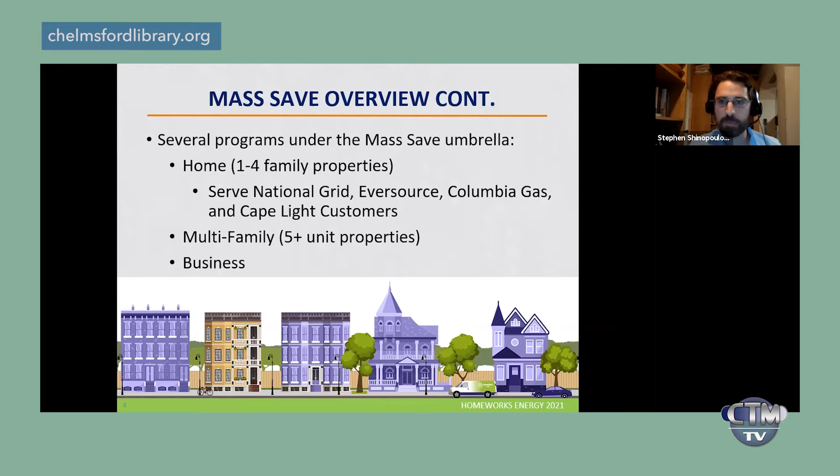Okay, so getting into the specifics of the home energy assessment, we offer, of course, traditional in-person home energy assessments, and then kind of as a response to everything that happened in 2020 and just being conscientious of the situation, the program did roll out virtual home energy assessments. So it allows the same access to the program just via taking pictures and a phone call or video chat.

And if some further projects are something that you might be interested in, we still do an in-person walkthrough later to make sure that we're ensuring the quality and the scope of any work. So that's just with in mind of reducing time in the home and things like that.

So the first step of a traditional home energy assessment is the health and safety check. And the first point of that is what we call the combustion safety test. So the combustion safety test tests the carbon monoxide, the efficiency, the airflow of your heating system. It also would look at things like your domestic hot water and potentially your gas stove if you cook with gas.

Next is a weatherization or insulation check throughout the home. So we're going to look throughout the home, basement, walls, and attic, assess the current insulation, any rebates you'd qualify for, and provide that information.

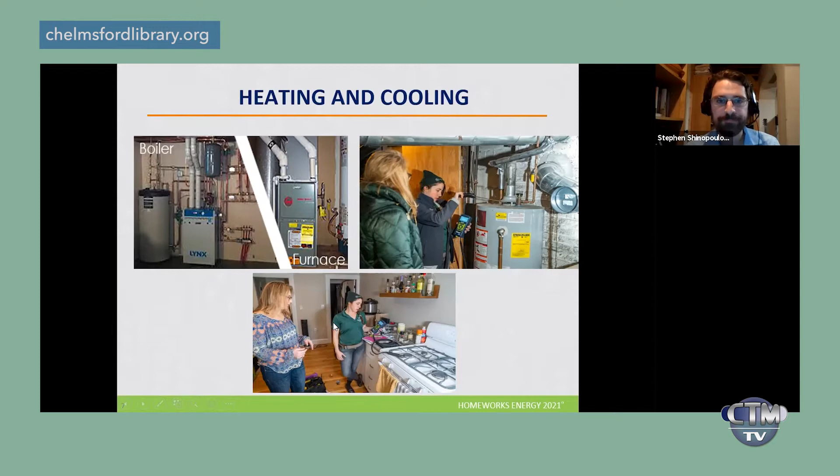There's a few reasons for that. Just to list them off, it's more cost effective. It's cheaper to produce, and it also has a higher R-value. So it's just quite literally more bang for your buck. It has some kind of secondary benefits, like it's treated to be fire resistant. And that same treatment also is something that bugs tend to not enjoy. So it kind of acts as a bug repellent as well. So it has a few kind of secondary benefits to just the insulation aspect.

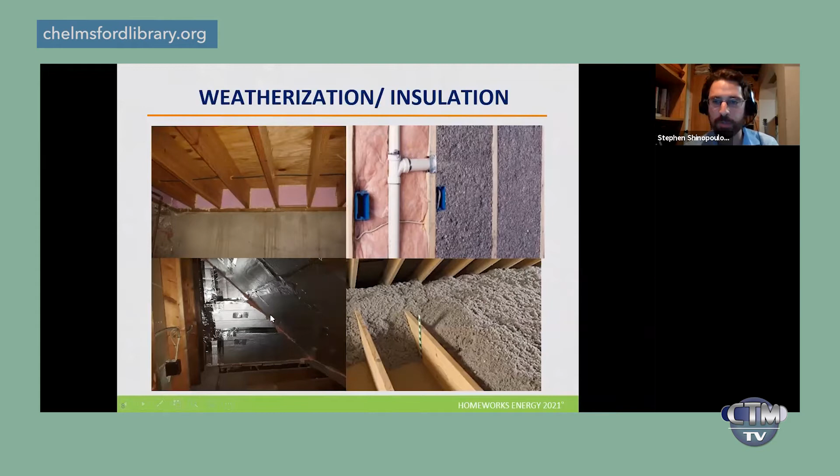And we'll use this for certain applications like vertical surfaces that something like fiberglass or cellulose just aren't a practical fit for. So in certain applications, we'll use this foam board as well. And it's an excellent insulator.

And I do also like to make a side note when I get to this slide that you might be looking at this blanket of insulation and wondering, oh, I have storage in the attic or a pull down staircase or potentially an HVAC system. And that's one case where we do still use that fiberglass batting insulation. We call it damming, as in like you would dam off a river. And that fiberglass batting is what would seal off certain areas like your staircase, your HVAC, or your storage. So we're prepared to deal with attics on a case-by-case basis.

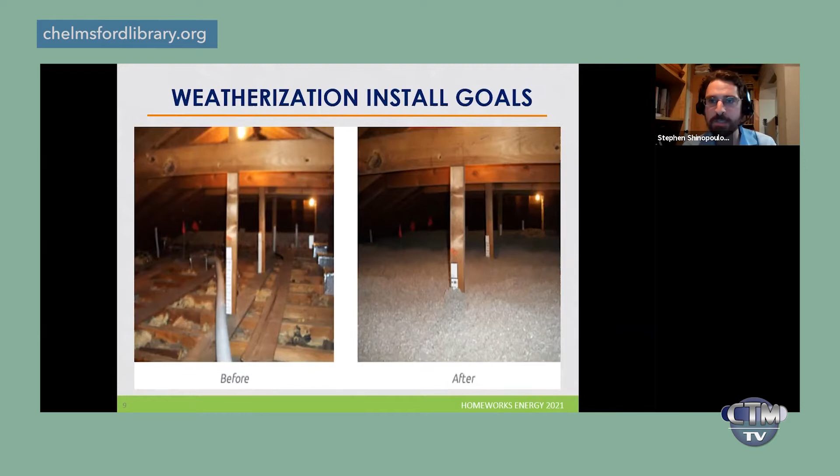And just to build off of that, the program is very aware that the attic is a very ideal area to weatherize your home. It's relatively simple, and it makes a big impact on the comfort and the savings in the home. And in turn, we make an emphasis to help homeowners with that because understandably, people have storage up there. They might not be able to deal with it themselves. So we can address that when it comes up.

We also do what we call an attic floor buildup, which is just a cool little tidbit I like to mention for folks who want storage in their attic and the maximum amount of insulation. We can actually build up the joists to accommodate both of those. So just a couple of pieces of info about working with attics.

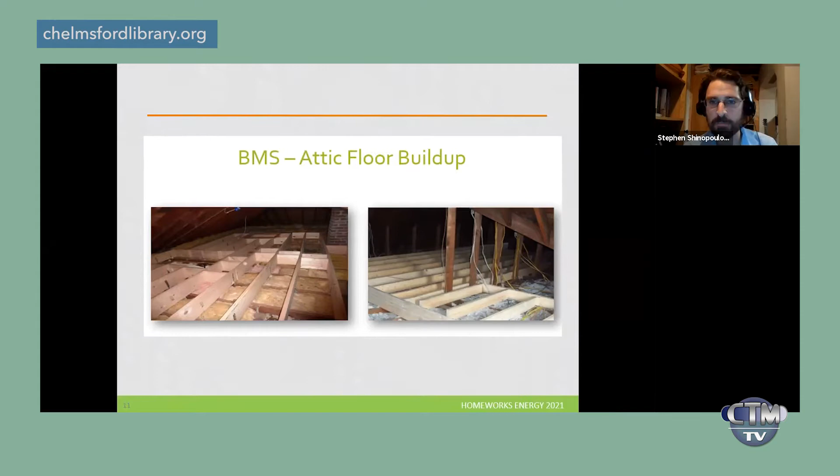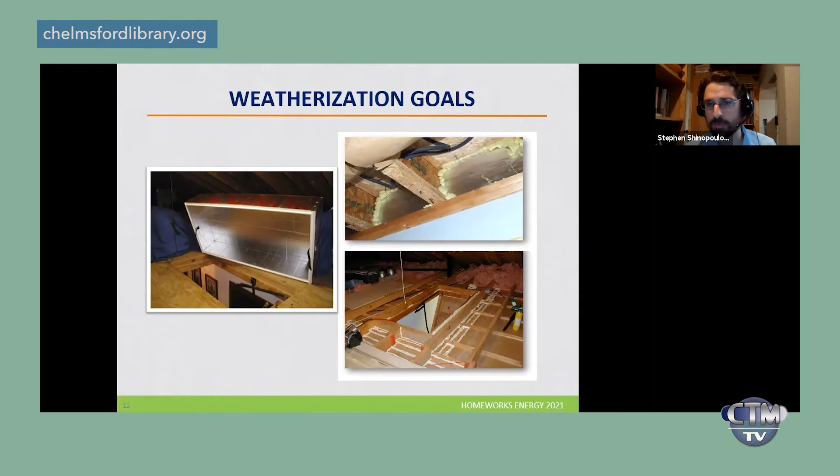And just one cool piece of the Mass Save program is that all of these air sealing measures, as they're deemed, are covered at 100% rebate. So all of this work can be done at absolutely no cost.

I do like to take a minute to address working in older homes because, of course, Massachusetts has a lot of beautiful historical homes. And it's something that we work with commonly. It just might be a little bit different on a case-by-case basis compared to some newer builds. Older homes didn't typically have as much insulation. The building code started to change in the 1980s to accommodate more wall insulation, more attic insulation. But there can often be a lot of opportunity to retrofit in these older homes. Part of the process that we work through is something we call pre-weatherization barriers.

And these are typical things you'd run into, like knob and tube wiring, which is the original form of electrical wiring that was used in homes, structural integrity of older walls, for instance, water damage, asbestos, just kind of the full assortment of projects you might have to work through in a home.

There is some opportunity for working with windows in the Mass Save program. There are not rebates for replacing windows. You can, however, finance moving from single to double pane windows. So that's another point I'm going to address in more detail in just a minute.

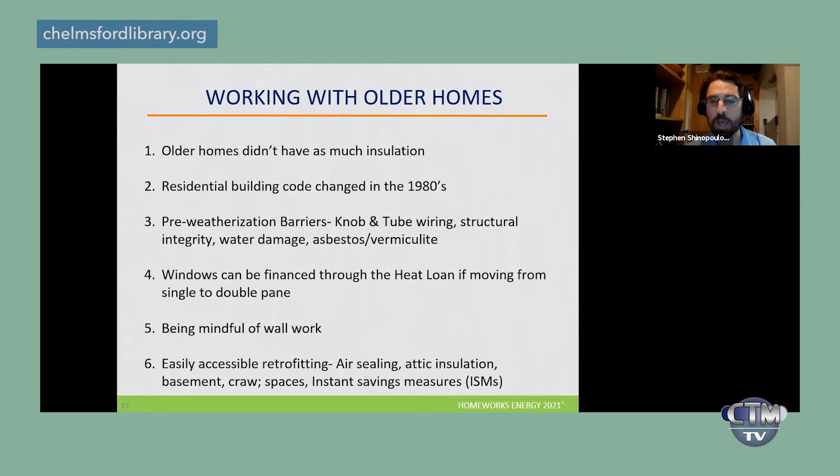Now, that being said, there are some very easily accessible retrofitting programs that even if for some reason you didn't want to insulate the walls, you can air seal the basement and the attic. Attic insulation is very easily accessible, and it's a relatively easy project. The same goes for the basement, insulating the perimeter of the basement, crawl spaces, and then instant savings measures, which are something that we give out at no cost during the assessments, and I'll be going through those item by item in just a second.

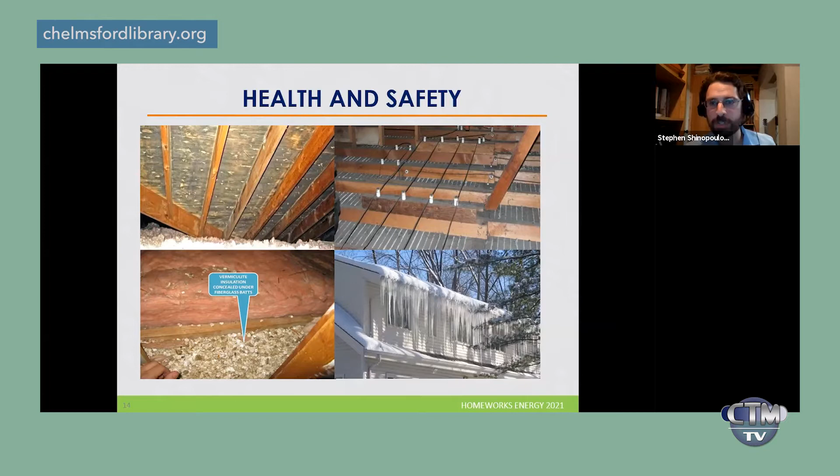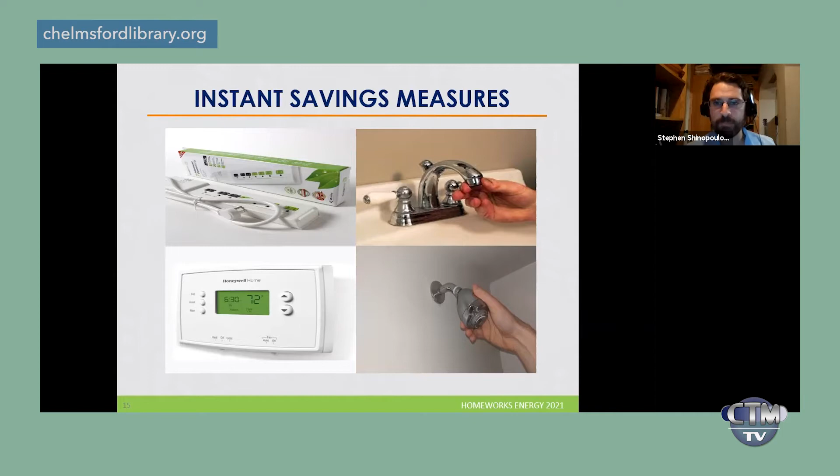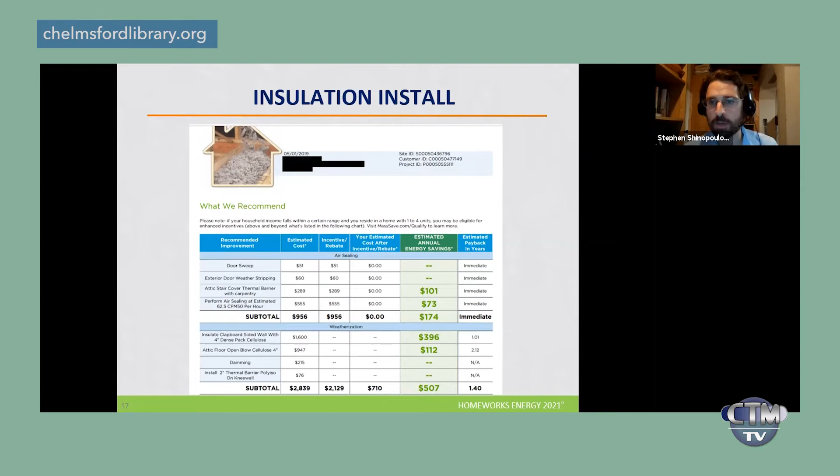Okay, and finally, essentially what I just went over, the home energy assessment report. We generate that with the homeowner and go over it, because every house is a case-by-case custom assessment, and we go over our findings each time with the homeowner.

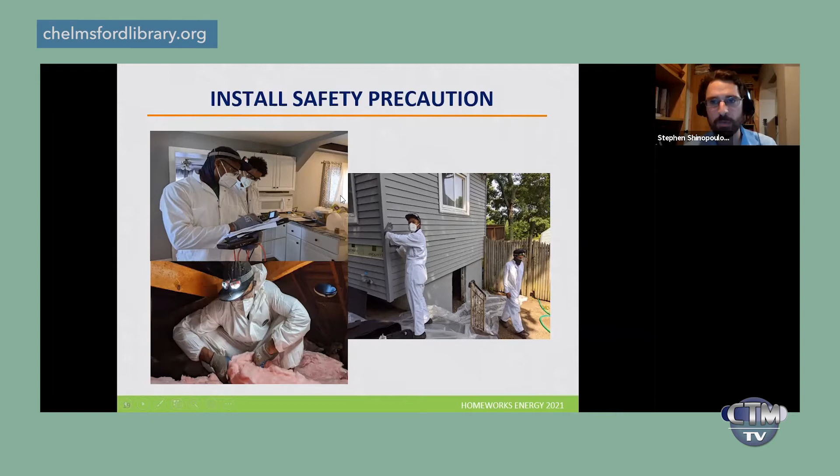Some notes about the current climate, 2020 and moving forward. The program did shut down temporarily in 2020 to make sure that the work was done safely and properly. We are very persistent and adamant about following these safety procedures. Our crews wear full Tyvek suits and masks. We hand sanitize before and after every appointment, and we do this through all portions of the home. If we are doing weatherization work, we're going to be wearing PPE throughout the home and taking every precaution we can.

Okay, and now to address HVAC a little bit, just a couple quick slides on this. I commonly get a lot of questions about heat pumps or ductless mini splits, and this is a very popular heating and cooling technology. It's great for the buffer seasons, so it's really effective in spring and fall. They do lose some efficiency in the dead of winter, but they provide supplemental heating and they're very effective for cooling, so there is some year-round benefit to these.

It's an alternative to ducted systems. If you don't already have them, it's kind of a nightmare of an invasive process to add ductwork to your home. So this is an alternative where you don't need a forced hot air system. The same fundamental technology is available with a very simple install, and they're very flexible, so they can be installed in specific rooms or to cover an entire home.

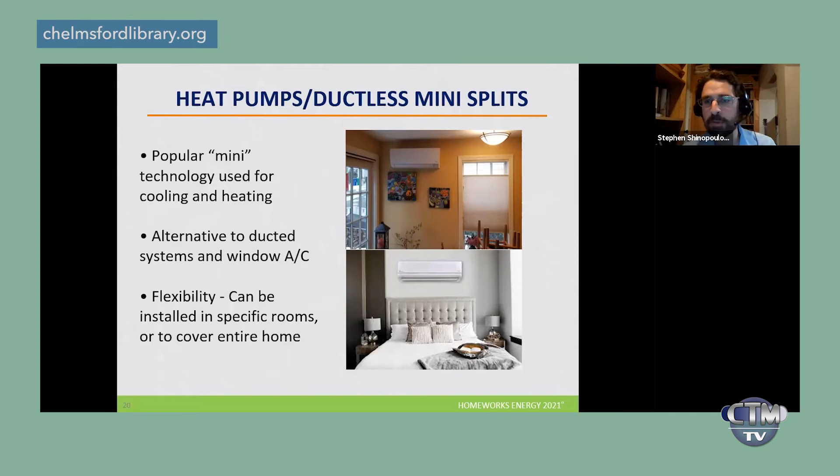And there's just a lot of adaptability that's not available in other HVAC systems. So to sum up, to get the big picture of ductless mini splits versus central air versus traditional window units, ductless mini splits are the most efficient. They're the quietest, and they also have the most flexible zoning options.

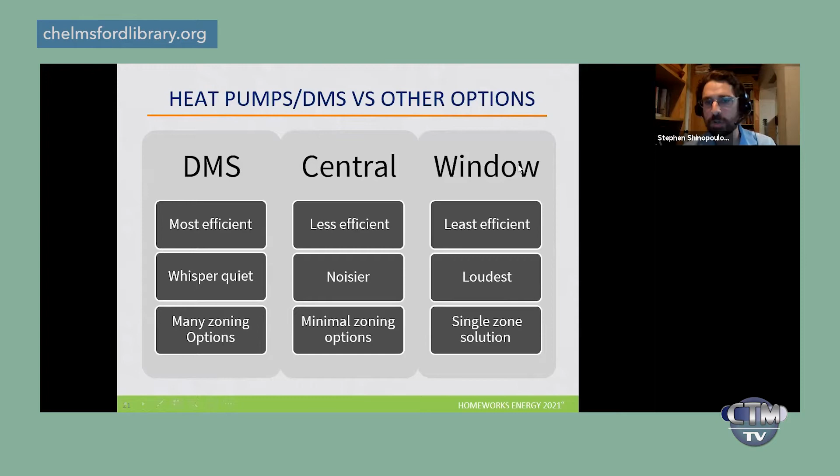Central air is next. It's not as efficient, somewhat noisier, less zoning options, especially if you're making some kind of adaptation to the system. And then window units, of course, are the least efficient, the loudest, and it's just a room by room solution.

Okay, and finally, we have the HEAT Loan. So this is the financing that's available through the Mass Save program. It is 0% financing. It can be used to finance pretty much all of the work I covered today. So that's heating systems, hot water, air conditioning, single pane window replacement, insulation copay, and health and safety issues.

So some of those projects I mentioned, you might be thinking, oh, remediating asbestos or knob and tube wiring. Those are pretty expensive projects, generally speaking. Fortunately, you can use the financing to help with that. And it's 0% financing for up to $25,000 over 7 years. There aren't other financing options like this. That really makes a lot of these projects much easier to tackle.

And one key note I like to make about this HEAT Loan is it's a one-time use per household. So people tend to use it on the bigger ticket items rather than just the insulation copay, which is a relatively modest cost in a lot of home improvement projects.

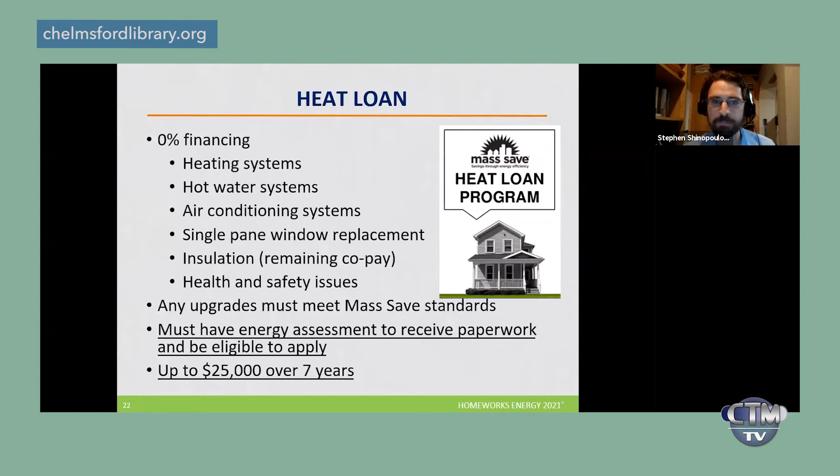Okay, and then we do carbon footprints. So I took the liberty of looking at historical information in Chelmsford. And again, this is just home energy assessments that HomeWorks Energy has done specifically. But since the start of 2019, we've done 381 energy assessments, which offsets carbon emissions by about 6,400 metric tons. So on a home by home basis, sometimes I wonder myself, how much of an impact does this really have?

But when you look at it from the big picture perspective, each assessment does add up, and it realizes pretty substantial savings. This 6,400 metric tons of carbon is the equivalent of planting 106,000 trees and having them grow for 10 years, or taking 1,400 cars off the road for 1 year. So there are some pretty substantial savings by doing this kind of efficiency weatherization work. And the savings are realized, of course, by those instant savings measures I talked about and weatherization work.

So in conclusion, why do people do this? With the Mass Save program, everybody has their reasons. I'm personally very motivated by the environmental aspects. I've volunteered on the environmental committee in my hometown for many years, and spent most of my career in the environmental field. But one thing that tends to speak to everybody is it does save folks money, and that's something everyone can benefit from.